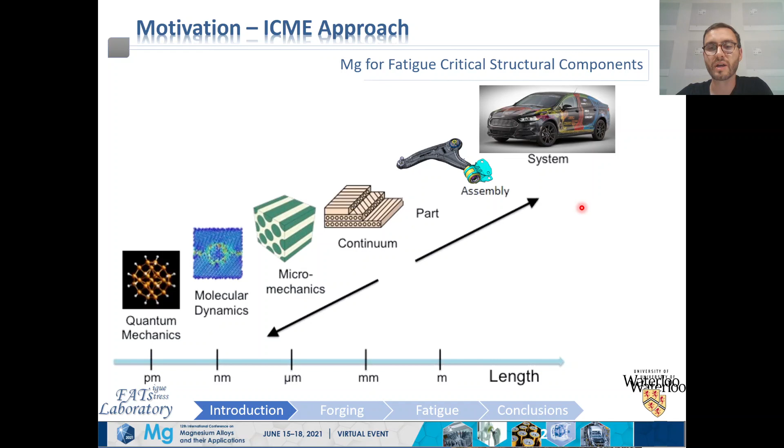You will see results from this talk spanning the full range of length scales illustrated in this diagram, but in general I'll focus on the micromechanics of the research and then gradually zoom out towards the system level, to see how the process-structure-property-performance relationship interacts with the knowledge development at each of these various length scales.

As somewhat of a prelude to my talk, I'd like to present this photo of the final production component. It's a production-viable component which we produced as part of this work—not only because this may be visually appealing to some of the audience, it did win a few awards already, but really to emphasize that the main objective of this work was vehicle lightweighting.

We targeted a fatigue-critical automotive suspension component, and we were able to achieve a 37% reduction in mass versus the aluminum baseline. This type of paradigm-shifting improvement is not new to any of you in the magnesium field.

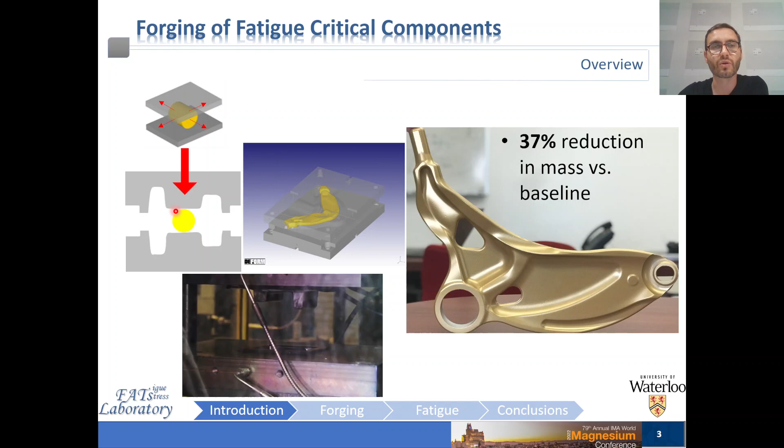However, it was only possible due to the experimental methods which we adopted to optimize all facets of the research process. On the left-hand side of the slide, you can see a schematic of the forging process, where intense pressure between rigid dies forces the material to flow into the internal cavities and conform to the desired geometry. This can have many beneficial effects for fatigue, as well as some detrimental ones if the process is not carefully managed, as is done at moderate temperatures between 250 and 450 degrees Celsius.

To describe this forging process in more detail, it is composed of the following steps, as part of a progressive multi-step process to manipulate the material geometry and properties. These steps are bending, flattening, die forging, and then machining of the final component.

We looked at some of the idealistic preform shapes, such as a flat preform and two types of cylindrical preforms, each of which have their own benefits and drawbacks.

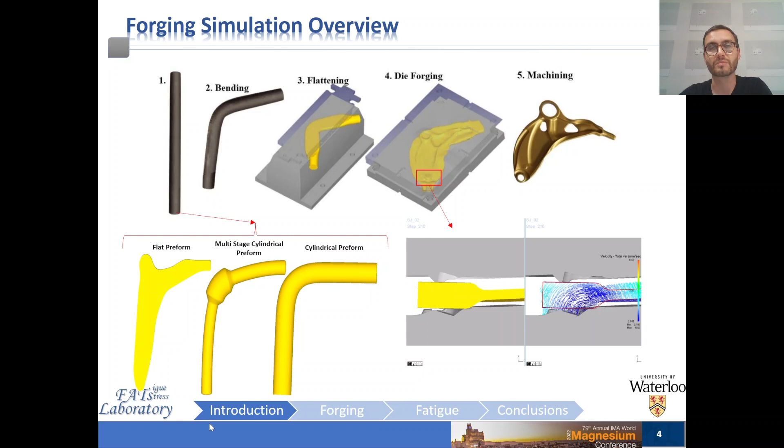We optimized the process in several ways. The forging temperature, as well as the strain rate, were both investigated. Furthermore, we took mass optimization very seriously, and we took it a step further by intelligently developing the component geometry, which was redesigned specifically for forging of magnesium. We just didn't recycle the geometry of an aluminum component.

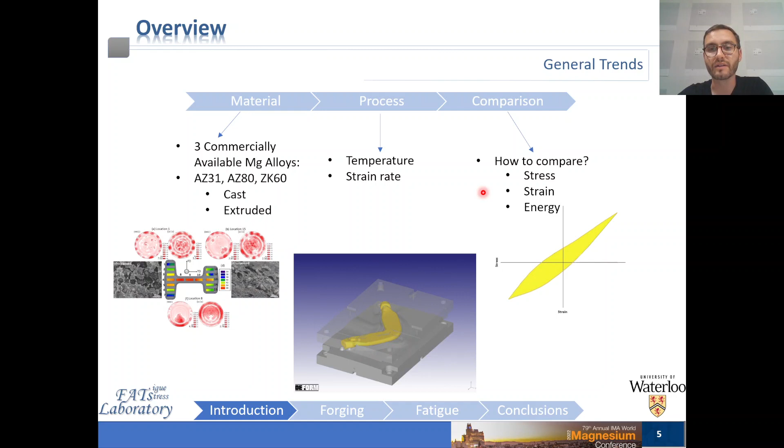An overview of my talk can be divided into three sections. The first two deal with understanding the effects that the starting material has on the fatigue of forged magnesium alloy, and the effect of the forging process parameters on fatigue, which is most significant. Finally, I'll follow up with a detailed method of comparison for using this fatigue data to understand how to design a forging process that will result in desirable fatigue properties for a production-ready component, and the variability associated with forging of real components.

Firstly, I'd like to describe the evolution of properties from the as-received material to the forged material. It is impossible to have one parameter which captures all of these effects that go into this process, but in general, the microstructural modification due to the processing treatments generally has a mutually exclusive relationship between strength and ductility.

In a very general sense, if the strength increases as a result of some processing technique for magnesium, generally it is at the compromise of ductility, as many of you may know. Here you can see the yield strength on the y-axis versus failure elongation on the x-axis, which are two of the most common and convenient, yet amazingly significant, indicators of fatigue properties for metals—and this includes magnesium.

This slide shows the range of tensile yield stress versus failure elongation for as-cast magnesium materials, for three different commercially available alloys from the aluminum-zinc family, which are AZ31, AZ80, as well as one zinc-zirconium alloy, ZK60.

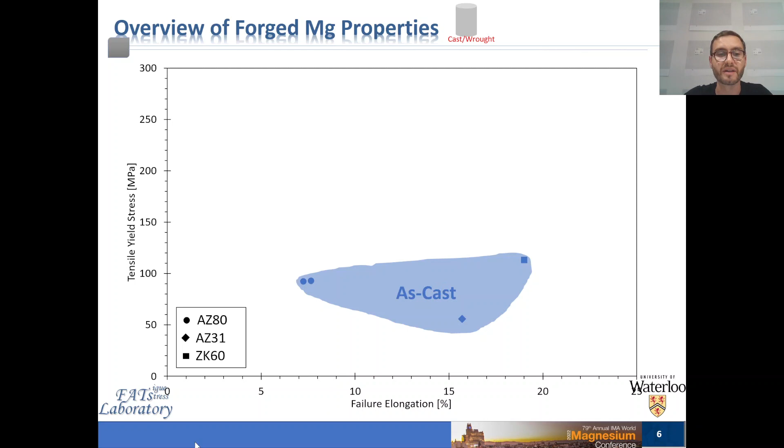Now shown is the range of properties for the as-extruded materials. You can easily observe here the well-documented increase in strength amongst the wrought variety of these alloys.

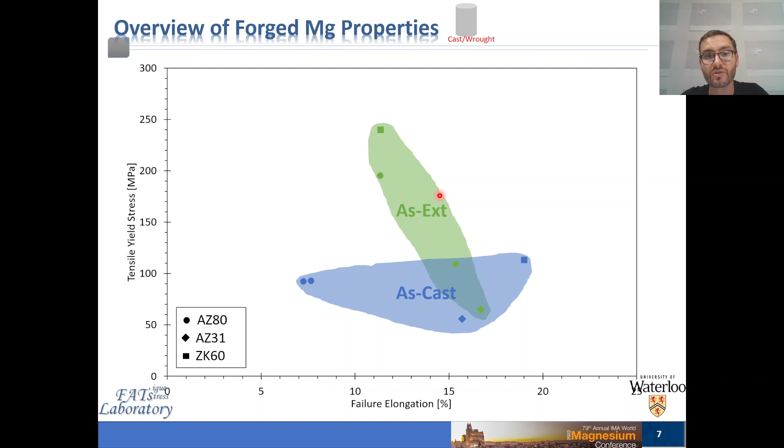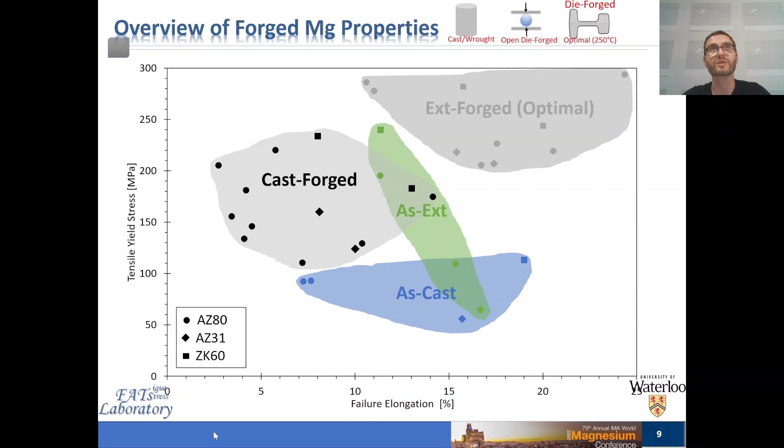Next is the extruded then forged material, which exhibits the superior classification of properties with enhanced strength and ductility. A subset of these data points represent the optimum forging conditions, which lead to the most desirable fatigue properties. The optimum condition in general favors extruded base material with colder forging temperatures, approximately 250 degrees Celsius, and faster strain rates.

The temperature for forging here was increased to 300 degrees Celsius, which in general improves property homogeneity and ductility throughout the forging, and can sometimes limit the defects you observe at lower temperatures.

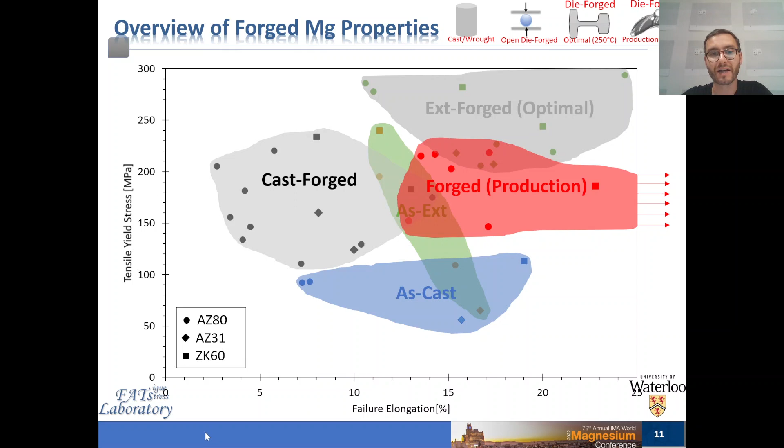Finally, investigating literature for properties of these same alloys, it can be seen that forging has a beneficial effect of both improving the strength and ductility relative to other more common processing methods used to produce near net shape components - that is, a component with pretty much the final geometry that will be used in service.

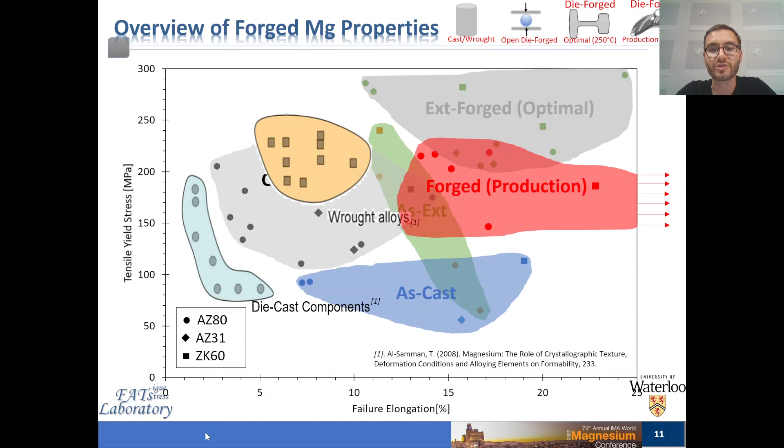This is a significant discovery as part of our project here, as in general, the strength and ductility are generally thought of as being mutually exclusive, as I mentioned earlier.

Now that was a lot of information regarding how we went about the project. However, to summarize and better understand the structure-property relationship, I distilled all of the phenomena I was just talking about into a few key elements.

In general, I'll be focusing on a single alloy now for the rest of the presentation. For these comparisons, which will be AZ80 magnesium, as it's found to be the most optimal forging alloy of the ones that were investigated.

So now the obvious question you might be asking yourself is: what is the difference between the starting point of these forging processes, in terms of cast or extruded material - what should you be starting with? On the left-hand side, you can see monotonic tensile response of as-cast and as-extruded material on the bottom in various material directions. You can observe that the cast material has identical properties in all three directions.

This differs from the extruded material, which is anisotropic in its response, a well-documented phenomenon many of you may be familiar with. Furthermore, there's an obvious difference between the two, with the extruded material having much higher strength and enhanced ductility, which is typical of wrought forms of magnesium alloys.

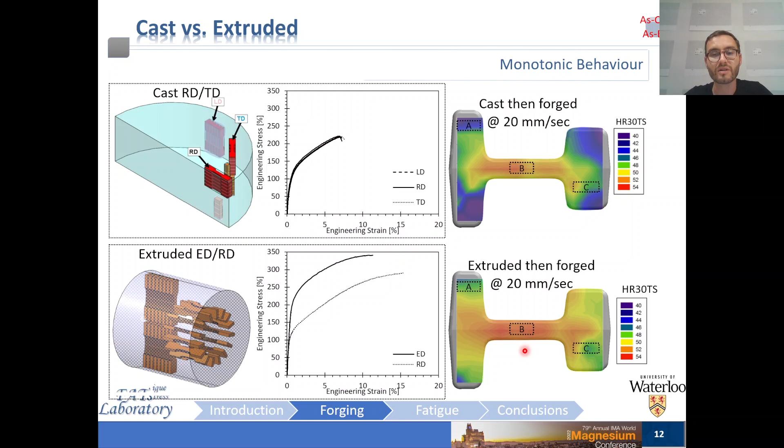Secondly, these observations are supported by the comparatively higher superficial hardness of the extruded material once forged, shown on the bottom here in this contour map of hardness. Due to the more complex cross-section of this I-beam forging, there will be pronounced spatial variation in the properties, which is a topic I'll discuss in more detail in a few slides.

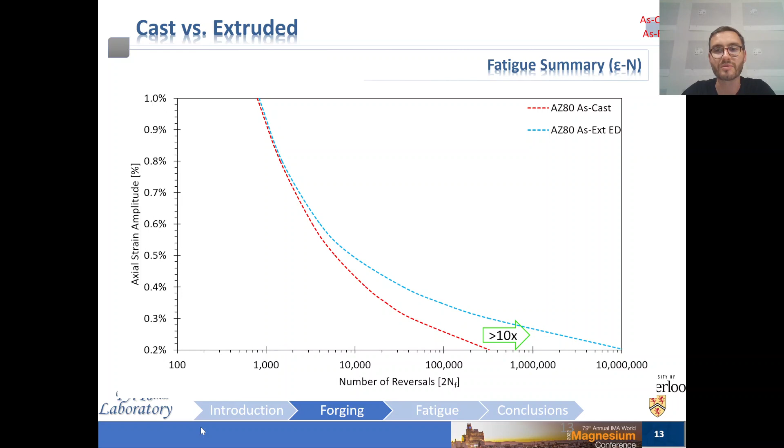Now extending this comparison towards the fatigue performance of cast and extruded magnesium alloy, as one might expect, there once again is a dramatic difference between the two, which is deeply rooted in these contrasting microstructures and different textures, leading to vastly different cyclic responses. Under strain control fatigue testing in the high cycle regime, for a given strain amplitude, the extruded material has a life superior to the as cast material by more than an order of magnitude.

Now, the second phenomenon which I'd like to discuss is the effect of forging temperature on the monotonic behavior, which is by far the most significant processing parameter.

You can observe here that in general, higher temperatures, shown in the plot to the right, have enhanced ductility but lower strengths. Furthermore, the increase in material properties is obvious between the as received and the forged materials, as you can see in each of the individual curves, with the as received being the black lines and the forged materials being the colored lines.

Linking that back to a previous observation, the superficial hardness correlates well with the yield strength of the material in various locations throughout the cross section of the forging. You can see locations A, B, and C shown in each of these plots.

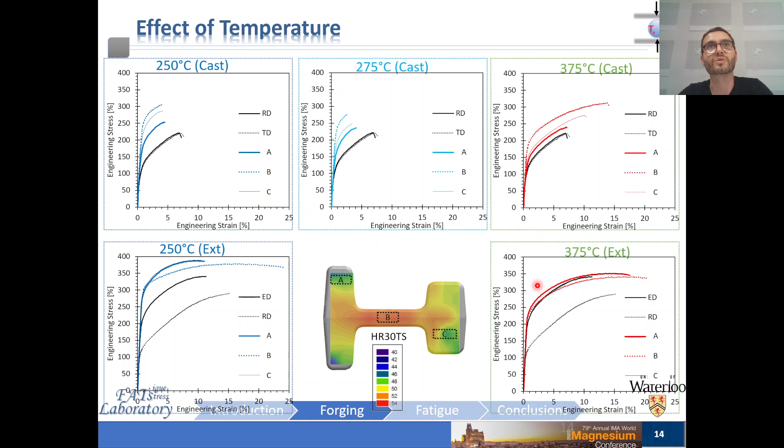The other important observation is how the base material is modified due to forging. There's a much more pronounced improvement due to forging when the starting material is cast, whereas the improvement when you start with wrought material as the base is somewhat more marginal, as one might expect, since the base material in the wrought form already has a lot of the beneficial effects of having a wrought microstructure.

The effect of processing temperature is really important in the last step of the thermal history prior to in-service use, i.e. it isn't the extrusion temperature, but the die forging temperature and subsequent cooling schedule following the forging process that governs the final microstructure you end up with in the forged component.

Although we did look at some post-forging heat treatments in this project, I've chosen not to discuss them here as they're very alloy and application specific.

You can simply think of the analogy that the final heat treatment will govern the resulting microstructure, precipitate content, and morphology of those precipitates, as well as the properties. If no specific heat treatment is given in the last step of the thermal history during the forging process, that's kind of what will be replacing it.

As you can imagine, the physical component is a very complex three-dimensional shape, as you can see in the top right here, and thus the local strain and thermal histories are a function of the location within the component, and they can vary quite a bit.

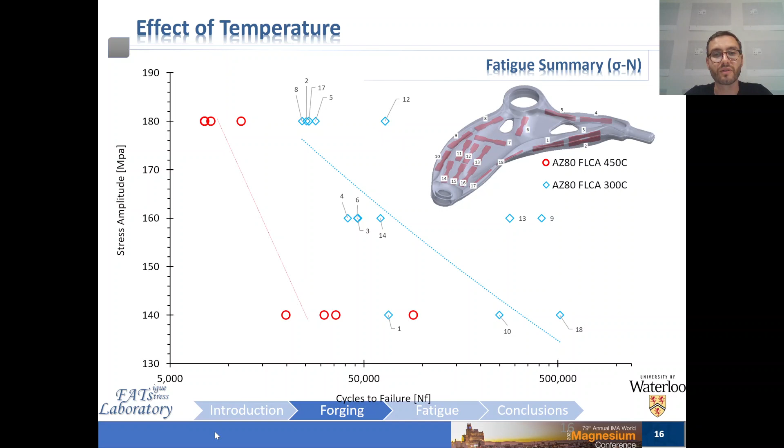Now overlaying the individual data points over these SN curves, or these idealized curves that you can see here, one can easily appreciate that even at the component level of forging, there's a large amount of variability that occurs in the properties, which is highly a function of the location within the forging itself and the thermomechanical history that specific location experienced.

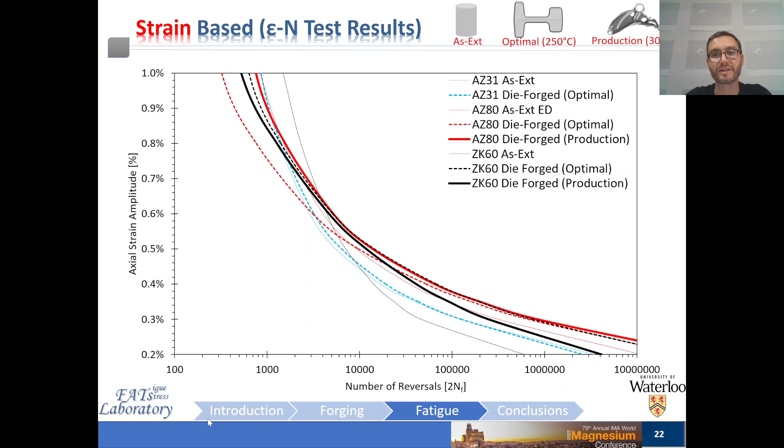However, for the production scale ZK60 component, the increase in temperature actually resulted in a decrease in the high cycle fatigue performance.

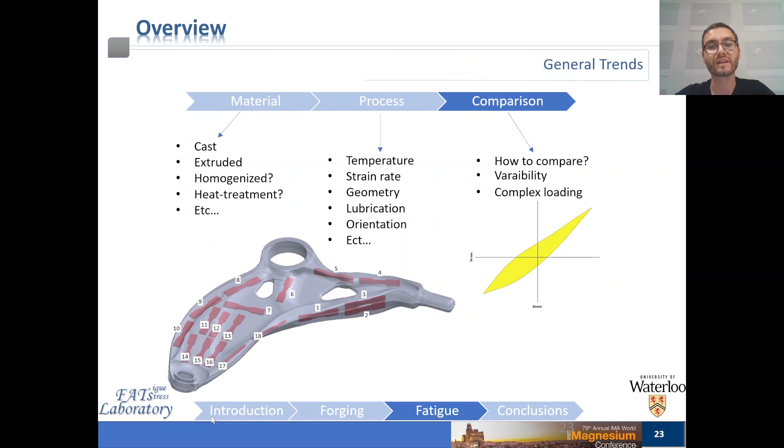So now you may be asking yourself, is deciding upon a comparison method to optimize the forging technique really as easy as just looking at all these response curves that we were just investigating and the ones that I've previously discussed? Although some very powerful general conclusions can be drawn from that type of analysis, the results that I've shown are really dependent upon the method by which you choose to compare them and the different variables related to fatigue. So keeping that in mind, I'd like to move forward to discuss how to effectively compare the material behaviors and quantify that variability.

So you can compare based on a strain-based approach, a stress-based approach, or an energy-based approach, all of which are detailed in a number of different papers that were outcomes of this particular project. So I encourage you to reference those papers if you would like more information.

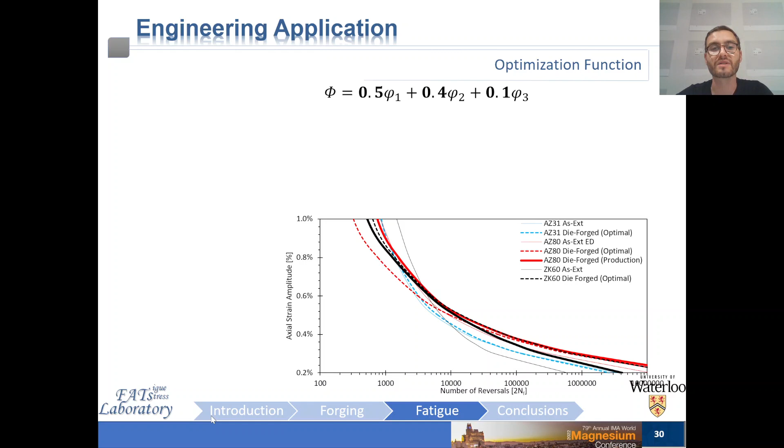However, what you saw previously was just a snapshot of a few forms of comparison to evaluate which processing condition would be optimal given the specific performance targets or property requirements that you have. Given the practical requirements of the engineering application, an optimization function was developed that incorporates three different non-dimensionalized variables, which incorporate various aspects of the material characterization into one function whose objective is to maximize its value to maintain optimal performance.

The first term, phi1, addresses the necessity for the component to have high strength and toughness. Non-dimensionalizing these individual property attributes against the maximum observed over the wide range of processing conditions investigated as part of this project allows us to have a term which reaches a maximum value of unity, or 1. So that's how these terms become non-dimensionalized, as you can see here.

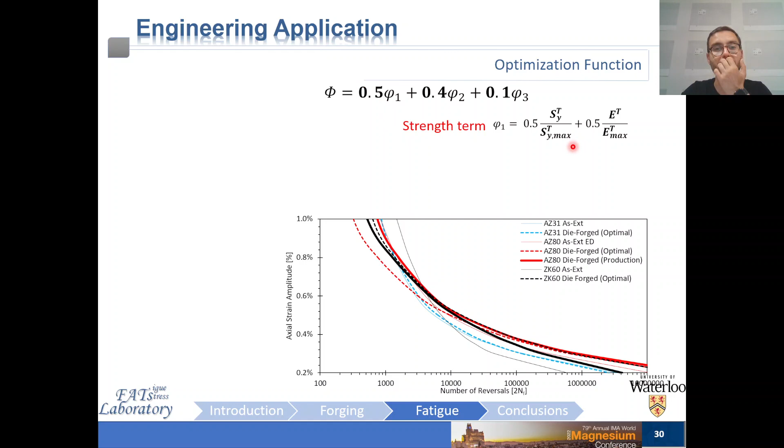The second term incorporates the fatigue behavior of the particular material in terms of the parameters extracted from a typical SN curve that many of you would be familiar with. And then finally, since fatigue is a defect-driven phenomenon, which is governed by the limiting location within the full-scale component that has the most inferior properties, the spatial variation is very important. We looked at the spatial variation of the hardness, or superficial hardness, to ensure we select a processing condition that produces uniform properties free of major significant defects. So that's the third parameter here, phi3.

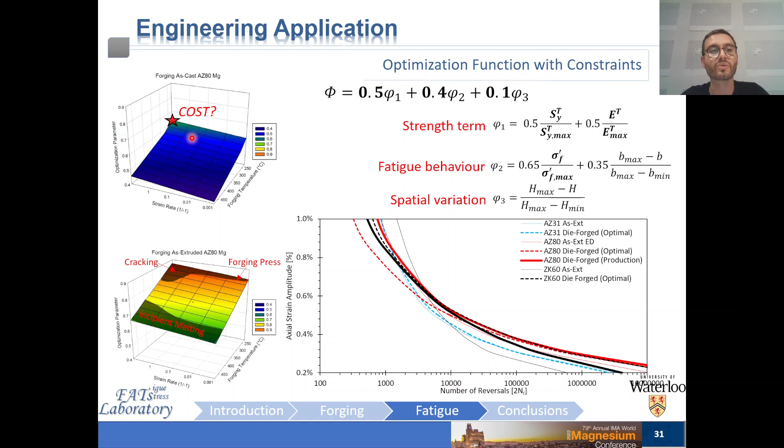Furthermore, although not very significant in AZ80 magnesium, the cost difference between the cast and extruded forms that you might start with prior to forging might make another option seem more attractive if cost saving can justify the degradation of performance. So as we previously discussed, starting with a cast alloy will result in inferior properties, but if the associated cost savings can be justified, that's a decision that needs to be made from the design standpoint.

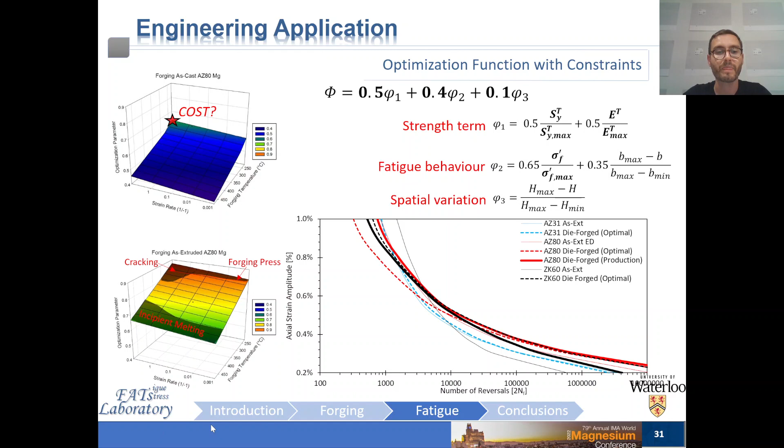So finally, to summarize some concluding remarks: of the three commercially available alloys that were investigated, AZ80 proves to be superior as a forging alloy. AZ31B has only a modest improvement in properties once forged, whereas forging ZK60 significantly improves the ductility but not the strength. However, AZ80 improves across the board and is the best overall compromise of improvement as well as ability of achieving a component while forging.

In general, forging at lower temperatures and higher speeds produces material with superior fatigue properties, regardless of the magnesium alloy being investigated. Obviously, the specific alloy you're looking at will have various levels of magnitude in which that statement is true.

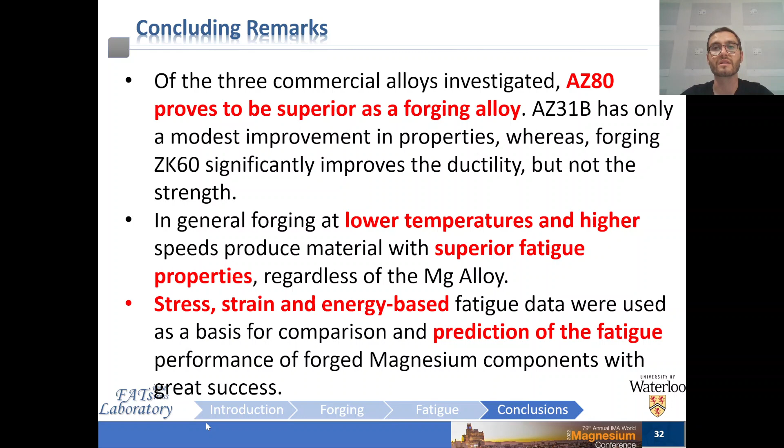And finally, the stress, strain, and energy-based fatigue data that we looked at were used as a basis for comparison for predicting the fatigue performance of forged magnesium components, and this was done with great success. We encourage you to employ these types of techniques, especially energy-based techniques, which work especially well for forged magnesium components, as outlined in a number of journal publications referenced in this PowerPoint.

And with that, I'd like to thank you for your attention and open the floor to the audience for any questions. In closing, I'd like to challenge the audience to tell me a concern they may have as researchers or industry professionals towards using magnesium as a material for fatigue critical components.

And hopefully we can open the lines of communication and discussion on that topic.